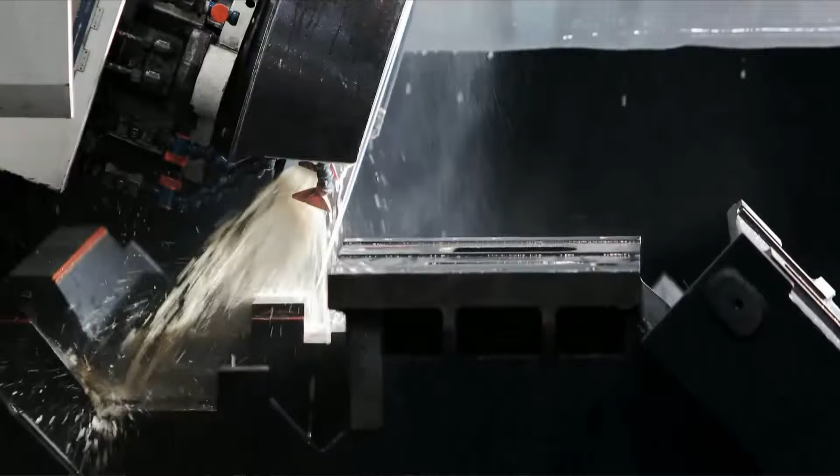Machine tools are the mother of all manufacturing, including the aerospace and high-tech industries, like a giant wheel turning the world. Taiwan's flexible production capability makes us a key partner of the world's industrial powers. We take pride in our sustainable industries.

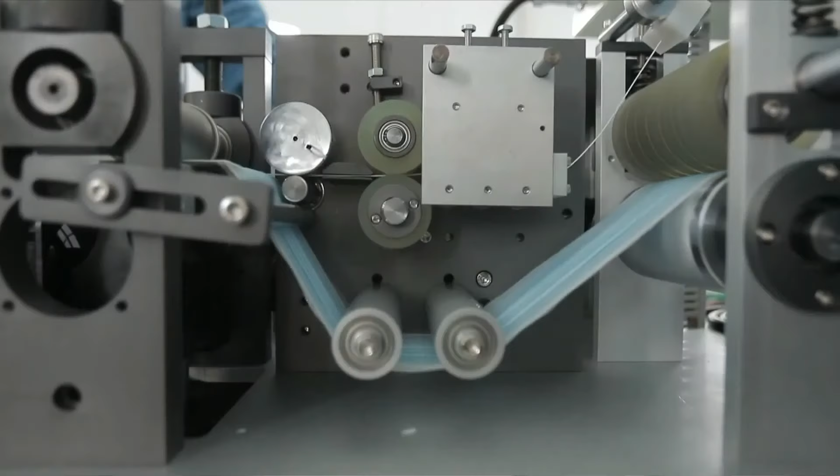The COVID-19 pandemic caused a global shortage of surgical masks. At this critical moment, machine tool manufacturers in Taiwan quickly took responsibility to set up production lines for surgical masks to alleviate the national crisis. Before the pandemic, Taiwan imported 80% of its face masks. Now producing up to 19 million pieces per day, Taiwan is the world's second largest producer of face masks, putting it under the global spotlight.

Over 2,500 people work the production lines. The national team demonstrates the unity, mobility, and efficiency of Taiwan's machine tool industry.

A manufacturing hub sits deep in the heart of Taichung. The 60 production lines were quickly set up in 25 days to assist the government. The national team assembles over 30 companies. We support the nation with honor and pride.

We take this opportunity to expand further into the markets of the US, EU, and ASEAN nations, and develop more talents, as well as our capacities in smart manufacturing.

Advanced technology with laser-focused dedication for perfection. Machine tools made in Taiwan, featuring Taiwan Excellence, moving towards smart manufacturing.

As an organizer of Taiwan Excellence, we are proud to promote the machine tool industry and Taiwan face mask team, and we are happy to share this Mission Impossible story with the world.

In normal times, we take care of the industries. When needs arise, the industries combine their forces to support the government. Let me extend my appreciation once again to the machine tool manufacturers for their great support.

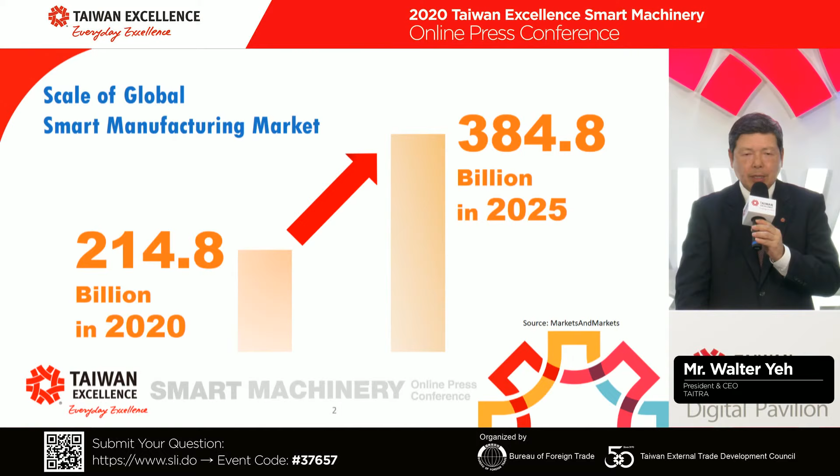Taiwan Excellence strives to continually showcase the best Taiwanese technologies in the world, even during this challenging time. We therefore launched the Taiwan Excellence Smart Machinery Virtual Pavilion to allow buyers around the world to access their products from anywhere at any time.

60 innovative products from 50 brands, including leading machine tools companies, can be found in the virtual pavilion. Products in the virtual pavilion will be kept updated to ensure buyers can always get the state-of-the-art technologies from Taiwan.

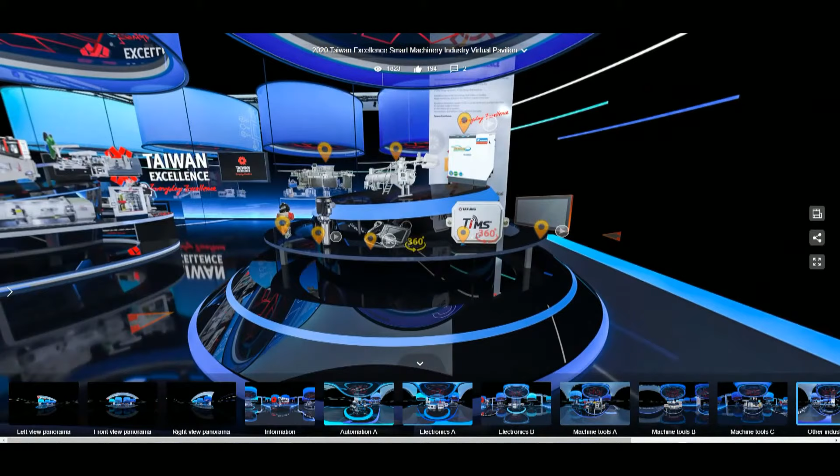Let's move on to the electronics manufacturing equipment area, the machine tools area, and the other industrial equipment area. And now we will focus on mechanical parts.

Here you can see HIWIN. You can click the icon to read the introduction, or click on 360 to view a picture of the product in 3D. Here you can rotate, zoom in, or zoom out for more details.

If you have any questions, you can move to our information counter in the pavilion. Click on the icon on the counter to leave your inquiry and contact us directly.

Next, we're moving on to the presentations. During this section, please feel free to submit your questions using the Q&A link on the screen. We will collect all the questions and invite the speakers to answer them during the Q&A session after all the presentations are completed.

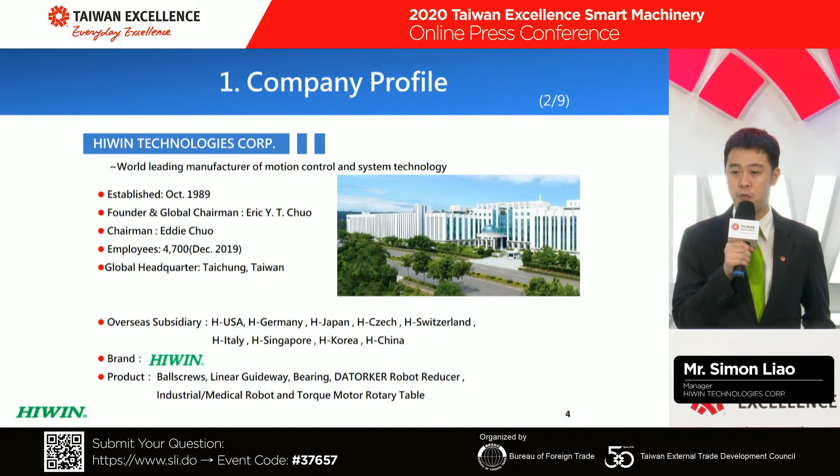Let's look at HIWIN Microsystem. It was established in 1997 to provide electronic component solutions for HIWIN Technologies products and offer a total solution to our customers. There are 600 employees with subsidiaries in Russia. The main products for HIWIN Microsystem consist of servo motors and drives, torque motors, and linear motors.

All of HIWIN's factories are located in Taiwan. We have a total of 7 factories in Taiwan, so all the key components for our products are made in Taiwan. HIWIN also has a global network, having 9 subsidiaries and distribution channels in more than 50 countries worldwide.

Here is the product map of HIWIN. We started off by manufacturing linear motion products and then gradually began to provide more complex solutions and subsystem products. Since HIWIN manufactures all our own key components for precision products and machinery, we have been able to incorporate these components to provide integrated module products for industries and machines, such as industrial and medical robots and rotary tables, among others.

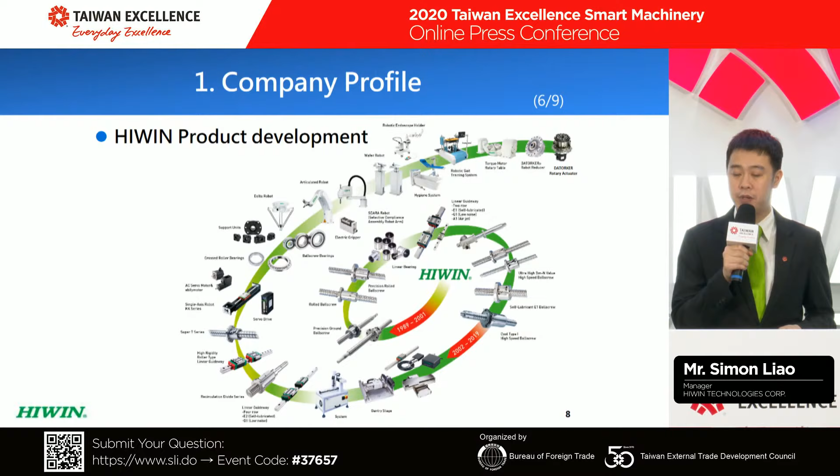Some of our best achievements include HIWIN currently being the global #2 in ball screws and linear guideway manufacture. We are also one of only 2 manufacturers in Asia for torque motors, and the only company that combines motion control components with electrical equipment to provide a complete solution to our customers. HIWIN is also the world's largest semiconductor coordinate robot supplier, and the 3 largest semiconductor equipment manufacturers in the world are key customers of HIWIN.

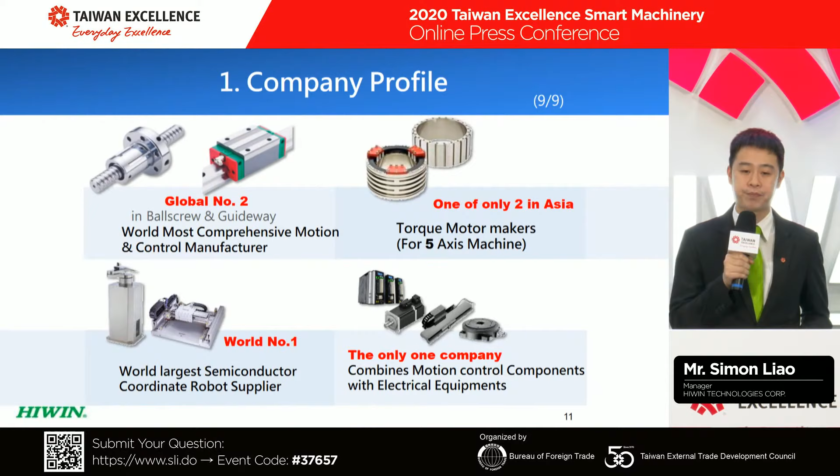Our outstanding performance has been recognized by the global media as well. We are ranked number 16 in the Nikkei Business Asia 300 Power Performers in July 2019. HIWIN was also ranked in Forbes Asia's 200 Best Under a Billion Company list in August 2019.

HIWIN has a constant focus on smart manufacturing, and we have collaborated with universities in Taiwan and abroad to develop the next generation Industry 4.0 ball screws. With a specially developed sensor and edge computing module, this Industry 4.0 ball screw is capable of pre-diagnosing the vibration, lubrication, temperature, and preload of a ball screw in precision machinery.

It is also capable of sending feedback to the operators via computers or smartphones to prevent an unexpected machine shutdown, thereby improving the productivity and reliability levels of the machines.

Next, we'll be introducing some of the total solution products of HIWIN, which are the core strength and value added to our customers. The KK Total Solution consists of the KK single-axis robot, couplings, servo motors, and drives. Customers receive this total solution for their automation. They just need to plug and play instead of looking for different suppliers for different parts and having the hassle of making and installing by themselves.

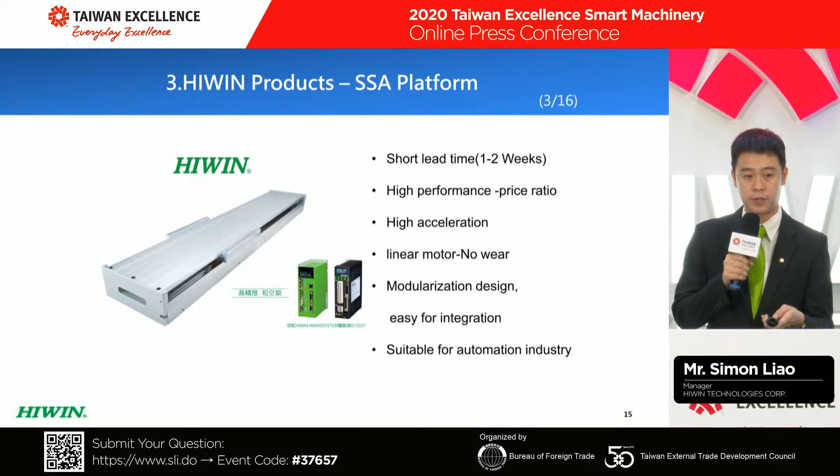As you can see here, some of the applications for this HIWIN KK Total Solution, including the application for LED inspection using HIWIN KK Total Solution.

Now this is a torque motor rotary table, which is one of HIWIN's main products. Being one of only 2 manufacturers of torque motors in Asia, we have the advantage of having in-house key components, technologies, and know-how. Therefore, we possess the competence to offer top quality, value-added products to high-end customers.

HIWIN designs and manufactures all the components such as torque motors, cross-roller bearings, rotary table bearings, and drives for our torque motor rotary tables. This is an example of the precision 5-axis machine using HIWIN torque motors to produce turbine blades for automotive parts.

The torque motor rotary table can also be used for this 5-axis machining to upgrade the machine and create a value-added function for customers. This enables the production of more complicated and precise components by a single machine. Here you can see the video of this 5-axis rotary table.

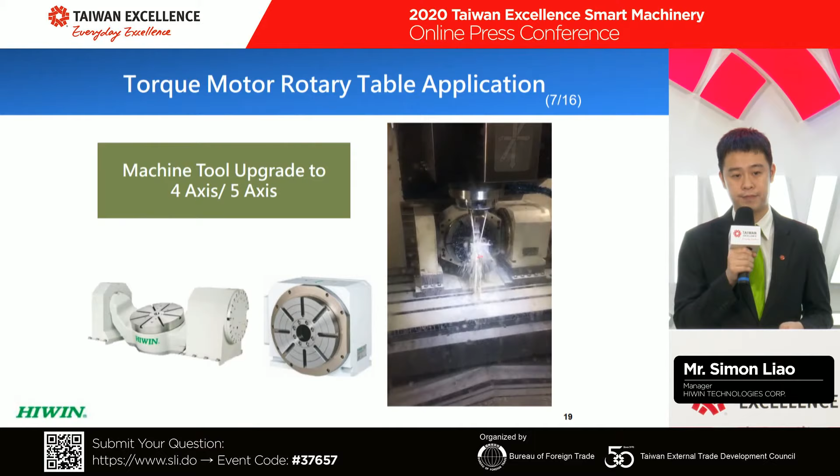Moving on to robots. HIWIN has a wide range of robots, ranging from articulated robots to SCARA robots for industrial applications, and Delta robots, mainly used in the food and pharma industries, to wafer robots, which are used in the semiconductor industries. Similar to the torque motor rotary table, all the major components of robots are manufactured solely by HIWIN.

This is an example of HIWIN's articulated robot for machining line pick and place. This is the Delta robot, installed for automatic labeling and pick and place in the food industries. Here is the SCARA robot for packaging and in-process inspection. And this shows the HIWIN wafer robots for wafer handling processes.

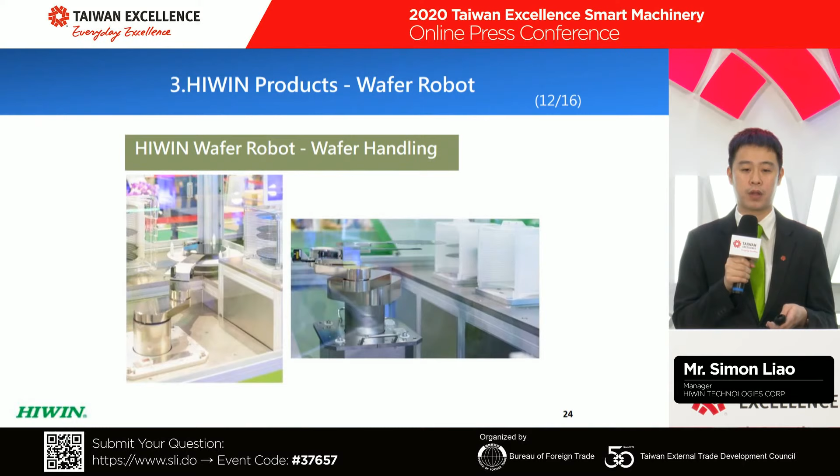This latest total solution product from HIWIN is the DRA, Datorker Rotary Actuator. This Datorker is a great precision and compact gear reducer with a high reduction ratio used in robots, high precision machinery, and indexing applications. Along with a servo motor and a D2D drive, we can offer customers an integrated product.

Again, the customers just need to plug and play. It offers an effective solution to our customers, performing precisely while ensuring the output of top quality products. Here you can see the applications of our DRA in process inspection platforms and automated equipment.

Displayed here is HIWIN's KK Total Solution with HIWIN Microsystems' linear motor installed in semiconductor process inspection equipment. The application of HIWIN's KK Total Solution with Microsystems' air bearing stage for semiconductor exposure machine. And here is a short video of this exposure machine.

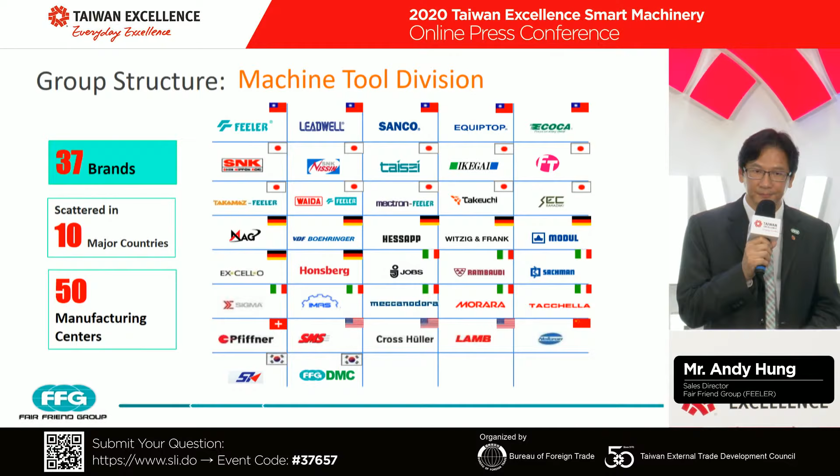With progressive growth, FFG is now a top 3 CNC machine tool manufacturer in the world. We provide all kinds of technology and solutions to drive human civilization forward. In terms of market share, FFG is number 1 in automotive, providing all kinds of turnkey solutions for our customers. We are number 2 in aerospace, number 3 in energy, and number 5 in the railway industry.

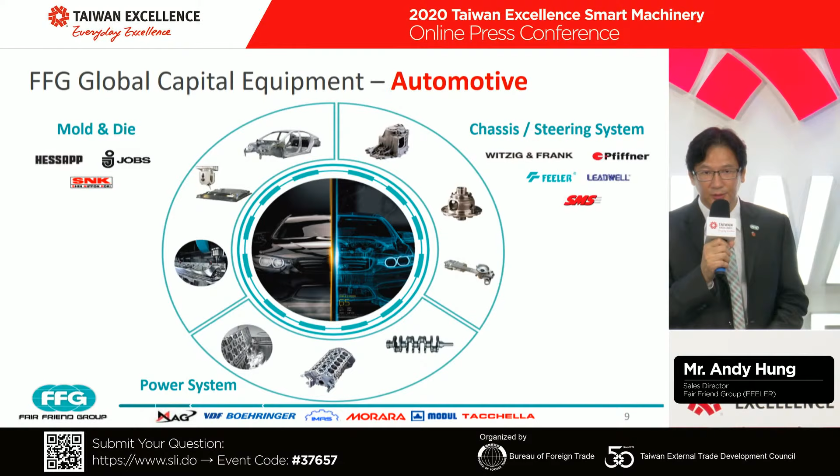Next is the railway industry, especially machines for train wheels and axles. For the energy industry, FFG covers a very wide range of power, turbines, and oil and gas applications. For the IT industry, we can very successfully offer tablet and cell phone machining. For the shipbuilding industry, components like crankshafts and diesel engines are also our field of expertise.

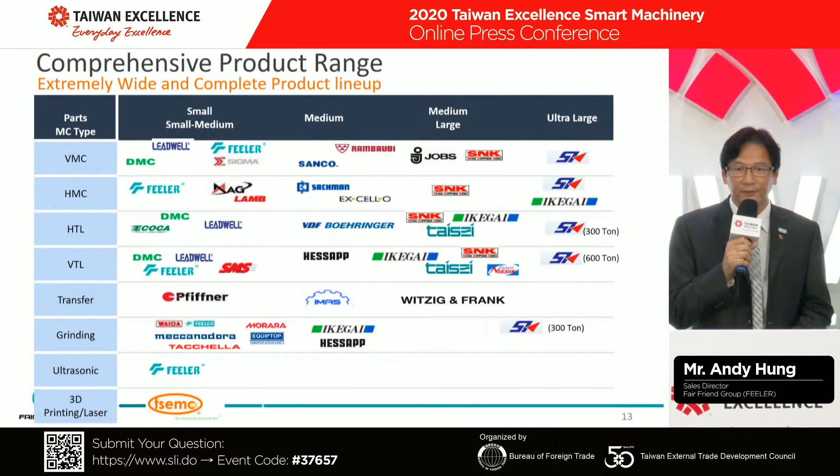With this comprehensive range, FFG can handle all pieces from small to big, such as something as small as a fingernail, and even larger ones up to 300 ton parts. Our machine types include vertical machining centers, horizontal machining centers, vertical lathes, transfer machines, and grinding technology to cover all the technology. We are also developing high-end 3D printing machines and ultrasonic technology, which helps us handle very tough materials with innovative technologies.

We are very proud to have received the Taiwan Excellence Gold Award in 2018, and this recognition has given us great help in promoting our products.

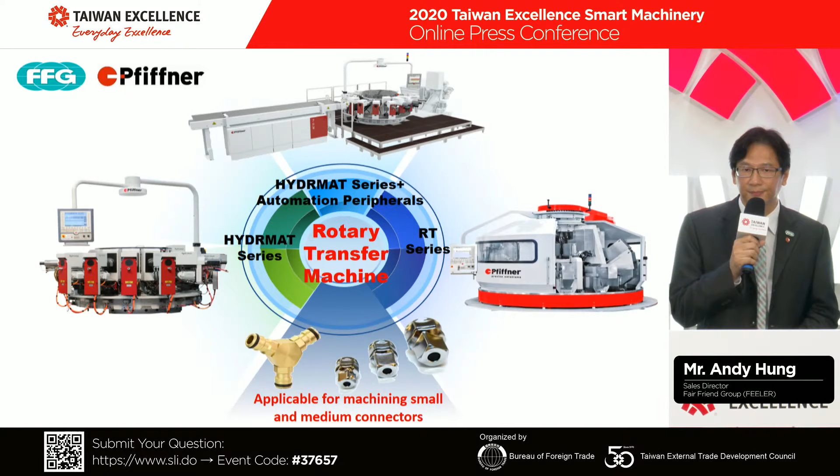On the next page, we would like to share with you that we focus on the future trend of smart manufacturing. We are also a leading company in Industry 4.0, and we provide a total solution of 5G smart manufacturing. We will go through this to strengthen our position.

This page shows that FFG is the founder of Industry 4.0, especially made in Germany, and specialized for automotive brands like Mercedes-Benz, BMW, and Volkswagen. This is our mission, to try to offer smart manufacturing to our customers.

FFG's core competence is that we have acquired so many machine tool brands, and the value of the acquisition is significant. In technology, we gain all the advanced technology and transfer it internally to our different divisions, to maximize our efficiency, reduce our cost, and make our lead time much shorter.

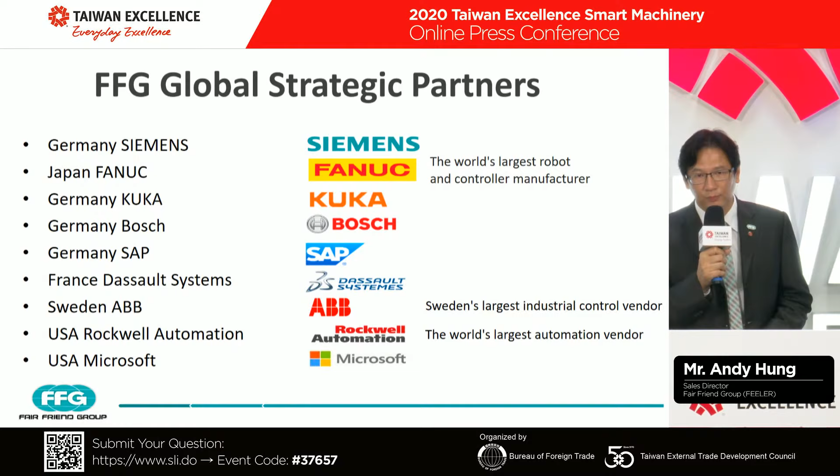To become successful in Industry 4.0, partners are very important for hardware, software, and control, for example Siemens, KUKA, Bosch, and SAP. These are all our strategic partners that help make our Industry 4.0 successful.

This shows the four levels of Industry 4.0. We go from small, single smart manufacturing units up to smart manufacturing lines, the third level is smart manufacturing management, and the top level is the data server and digital twins.

From our standalone machines, we can install sensors like cutting vibration technology, thermal compensation technology, and anti-collision systems, making the machine much smarter and even preventing bad parts from being produced.

The next one is line monitoring. We created parts like spindle and turret magazine monitoring, and also installed more systems to become a smart manufacturer, which collects all the data to show a dashboard displaying the status of the entire production line.

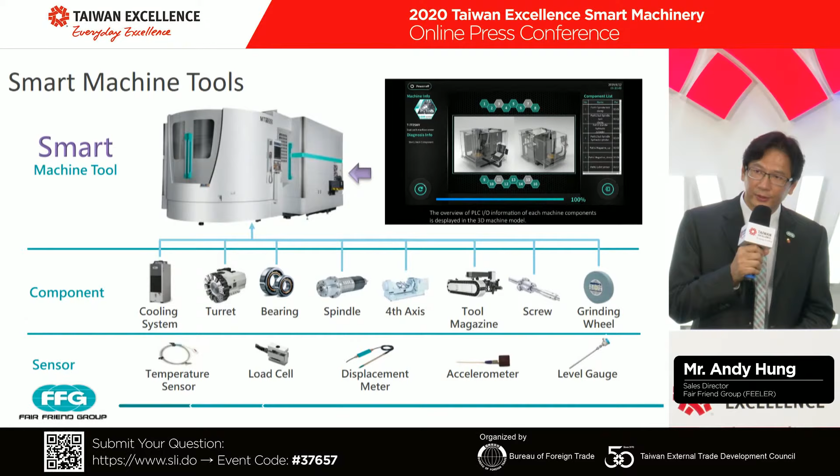In the upper right corner is FFG iFast, a more friendly interface that lets operators and management easily monitor the condition of production. It's built as a friendly framework to help managers and operators catch real-time information.

Even with different kinds of machines and controllers, we can catch all the data and transfer it into our dashboards, making it easy to understand the machine condition and total production instantly.

In this one, you can see the videos. In 2019, we showed our automated production line and main system, which can totally run 24 hours, 7 days a week, for engine block production, including horizontal machining centers, AGV, and robots.

We also made a 3D simulation, so customers can see exactly what the demo lines look like even before implementation.

So this is what we'd like to show you: Industry 4.0 is a big construction project. Especially, we need to integrate many additional accessories, and for transmitting without lag, 5G is also the key to a successful platform. No one can do that alone, and we need to integrate with our machines.

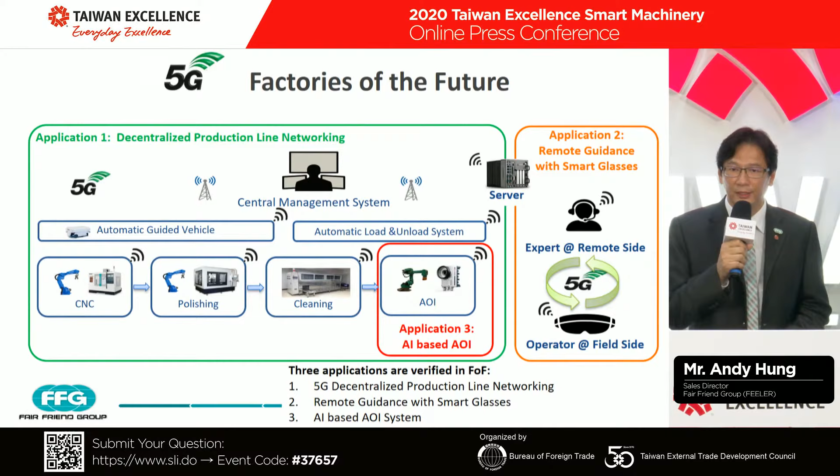We already have 5G factories in Taiwan, including for AGV, robots, cleaning, AOI, and online robots. So we sincerely invite you to go into Industry 4.0, the revolution is coming.

We are very glad to say FFG can offer customized solutions for different kinds of industries. Let us be your win for the future. Thank you very much.

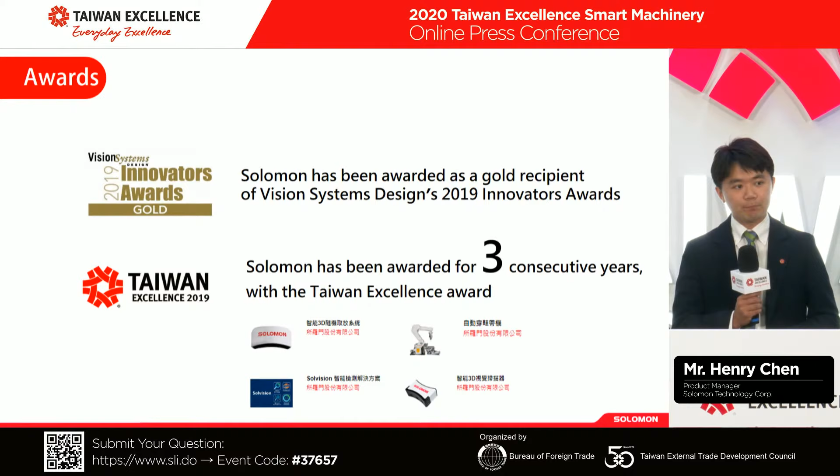We are a Vision Award winner, starting from 2019, which is the biggest Vision Award in the world. And of course, we are a continuous Taiwan Excellence winner. So on this page, I'm going to tell you what we can do for you.

AI software from Solomon is like a platform. We can communicate with different scanners, like structured light technology from the Solomon scanner or Intel RealSense. We are able to customize, depending on your budget and accuracy requirements, to give you professional consulting about which scanner you would like to use. We are also able to communicate with robots, including cobots or industrial grade. We can integrate more than 20 robot brands for now. And we not only send the coordinates, but also communicate with and control those robots in your factory.

A lot of people ask me what your AI can do for me. Actually, our AI is like the human brain, and we are able to learn the parts not only from the shape or the contour, but we can see the color and the pattern. Through our AI deep learning model, you can learn the parts you would like, like human eyes. We don't need a CAD file.

We offer our software interface without any programming. You don't have to do any coding. It's very easy to use. And we can read the parts combined with the 3D point cloud. We give you the accurate point cloud and coordinates.

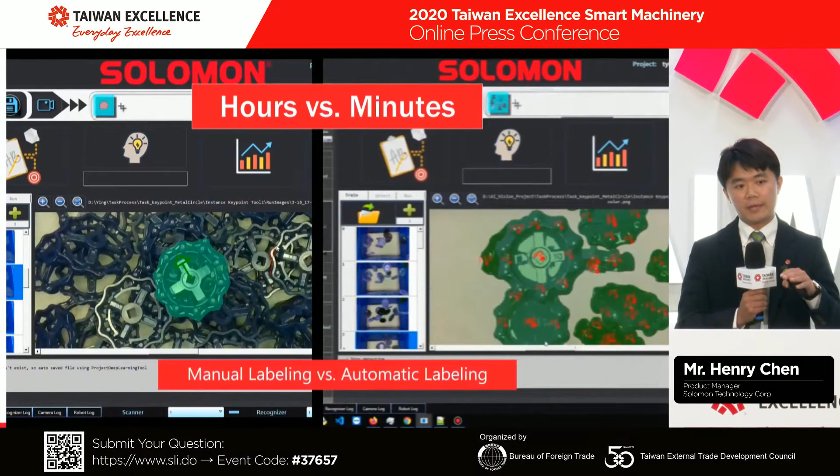For example, here in this video, you might have some parts like this in your factory. You want to do pick and place or robot guiding. With traditional technology, you have to do manual labeling by hand, right? But here, we offer you software to simulate all the possibilities in the process, and we can auto-label those parts and learn them in the 3D environment. So you can see, after a few minutes, the AI can learn those parts. We are able to see the top view or the bottom view and pick them in the 3D environment.

As I mentioned, we are able to control your robot. So not only sending the coordinates, but with our interface, we can control all the robots with one single control panel, which is the Solomon control panel. We call this service master control.

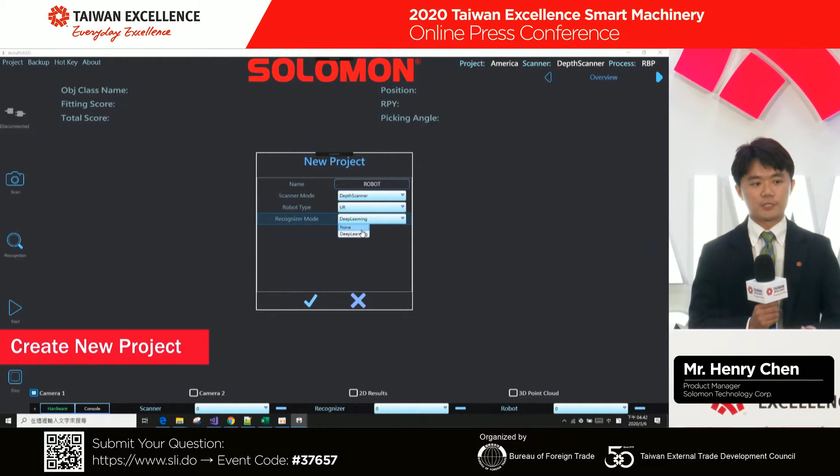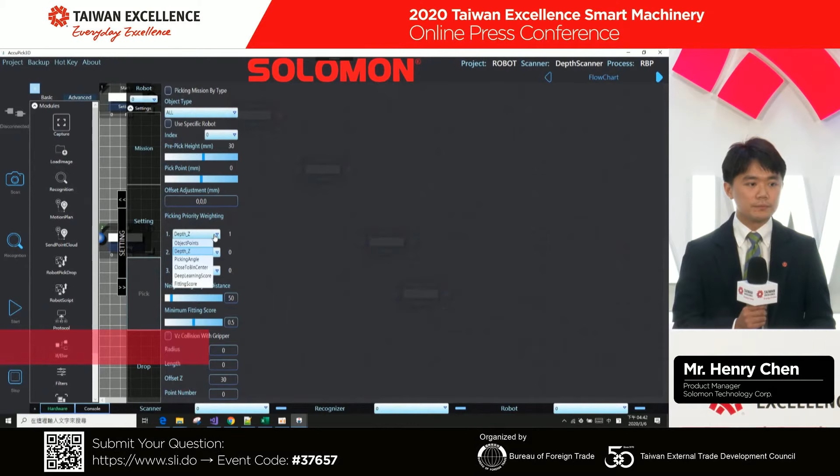So we got your values. We can use them to control your robot, as I show here. Not only that, we can also control I/O, grippers, sensors, or conveyors, all the surrounding equipment. So with one single interface, you are able to complete this robotic pick and place mission. This is our pick and place, pick and drop setting. After all the detailed settings, you connect the whole sequence, make it a loop, and it's finished.

Okay, so because of the time, here I want to show you some of the references we have. I start from AccuPick, which is the robotic pick and place. The first project I would like to share with you is the video filmed by National Geographic. We're doing this automation for one of our logistics partners, CTW Logistics.

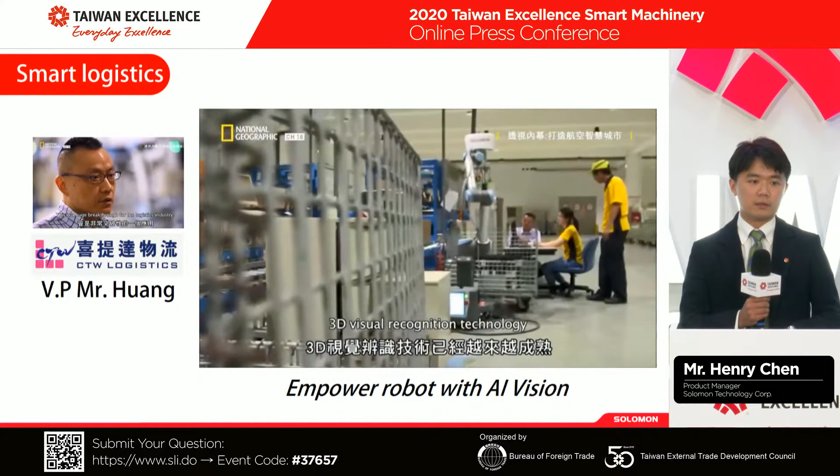So you can see if you don't have the vision, the robot can only do the repeated job, right? It's like blind, totally blind. So if the parts in your crate shift or change position, you are not able to pick them successfully. So here, Solomon provides the vision to be able to see the parts in the crate. And every time, depending on the situation in real time, we give you the coordinates of those containers. So this is one of our services to do the loading and unloading.

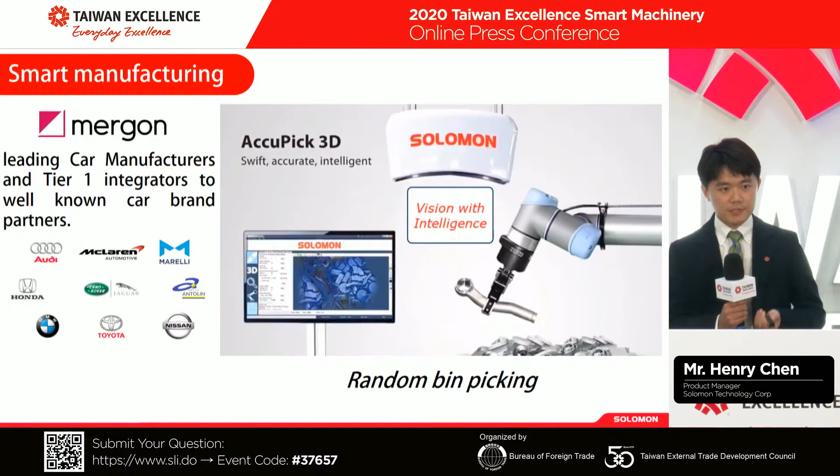And second, I take the Mergon example here. They are a leading car manufacturer in the US. Here, we challenged one of the bin picking solutions for them. We are able to pick something really tiny and shiny. For example, here, you can see the parts. All right. So you can see the parts. They are around 1 centimeter by 1 centimeter, and the surface is shining.

Sometimes they are overlapping. So with traditional 2D vision, it's almost impossible, and they almost failed in the project. That's why they came to us, and using our 3D technology, we are able to deep learn those parts in the top view or the bottom view. So the service is good, the production line is continuously running, and we got repeat orders from this project as well.

So after scanning, we are able to get the position and all the offset data, and after we analyze, we compensate those coordinates in 3D and send them back to the robot. So even if the customer has an offset of more than 5 centimeters, we are still able to provide them the compensation data and do the gluing or sealing they want. So in the future, you don't have to be troubled about which kind of customized fixture you have to use in manufacturing. We try to give you a generic, so-called universal solution. One single scanner, and you can do all the robot guiding without any problem.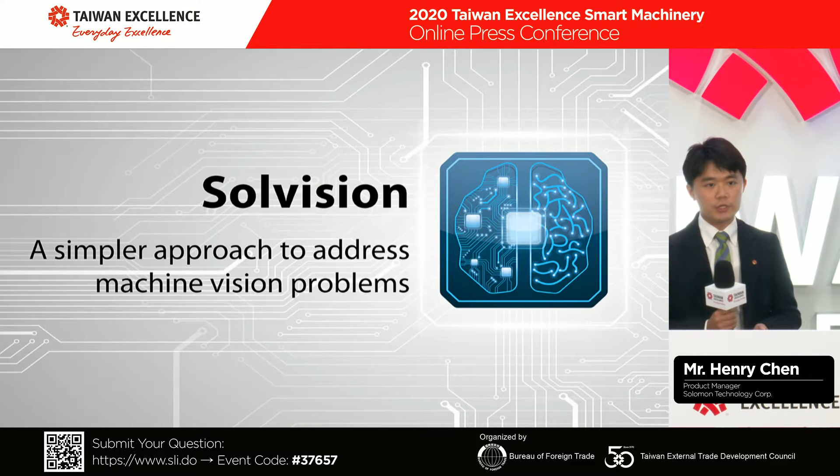The final product is Solvision, which uses our AI software to do the inspection job. What we focus on is usually defects that are difficult to define. For example, the color range or the size varies. Using the traditional way, it's almost impossible to give you the golden sample. So in this situation, you use our AI to deep learn those different kinds of defects, and we create the model for you. So with this AI model, you can run it on your production line, and it can see like human eyes which defects you want to pick away.

Okay, so together we have robotic solutions, including 3D pick and place, robot guiding, and finally Solvision to do the AI inspection.

After more than 3 decades in the machining industry, people have got used to us. Through periods of high growth and development, we were right there at the front. And through times of uncertainty and doubt, we stared adversity in the face, unshakable. We have developed a thick skin, an amazing ability to move forward with determination. Every step in our journey has left a mark, on us and in the market.

Over many years, we have developed great partnerships, invested in development, reinvented ourselves a few times, all in the interest of being here for the next generation of machine users, all in the interest of being here for you. Nowhere in the world will you find a team more determined to be around for 100 years. And we know we will, through the quality of our products, through the strength of our partners, through the unbeatable value that we offer. Manford. Power and determination.

Okay, after this short video, I'm proud to tell you about the founder of Manford Machinery, Mr. James Shade. His goal is to provide a one-stop service for his customers. So since the company started in 1987, the Manford Group has expanded the scope of its business by building up 5 individual brands: Manford, Winford, Avemax, Automax Smart Auto, and Manford Garden, with each one focusing on different products designed for use in specific fields.

So for the purpose of one-stop service, Manford Group has more than 33,000 square meters of production space and around 200 employees to ensure the consistent supply of products with very competitive lead times. Let me introduce more about our brands.

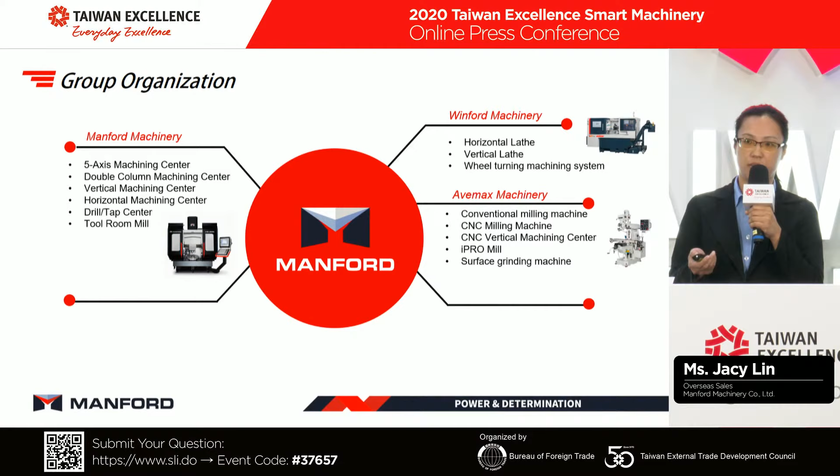Our high-end CNC machining centers, like 5-axis machines or double-column machines, are manufactured by Manford, and Winford focuses on CNC lathes. And Avemax takes charge of conventional milling machines. And Automax mainly integrates the systems to make automation planning for the whole production line. And thanks to Manford Garden, our machines come with leading edge outfit. Now I will give you a brief overview of our products.

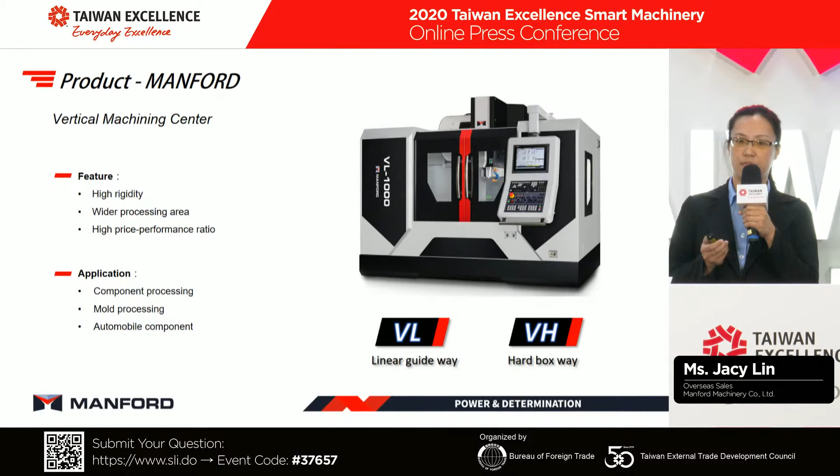This is a conventional milling machine produced by Avemax, applied for automobile components or molds. While this is its surface grinding machine. And this is Winford's CNC lathe. Please note that we provide both vertical and horizontal CNC lathes. And Manford's vertical machining center, which has the VL and the VH series, is displayed here. X-axis travel from 510 to 2,200 millimeters.

And for the growing market of 5-axis machines, Manford has launched VU, VG, and VX series of 5-axis machines to respond to the increasing demand. Here, I would like to take a little bit more time to introduce the VU620 for you. The VU620 was designed and developed by Manford for the growing market of 5-axis machines. What makes it special? Well, for a start, it uses 90% less oil and 80% less electricity than the normal lubrication system and pump motor.

In addition, it is capable of 5-face machining that can be completed in one clamping with high precision and short process time. Second, it reduces special fixture dependency and realizes automation. And third, 5-axis machining extends tool life and improves service quality. And fourth, it reduces equipment investment costs, workshop footprint, and even the number of workshops necessary to produce your products. So based on all of the above characteristics, the Manford VU620 won the 2020 Taiwan Excellence Award as an honor.

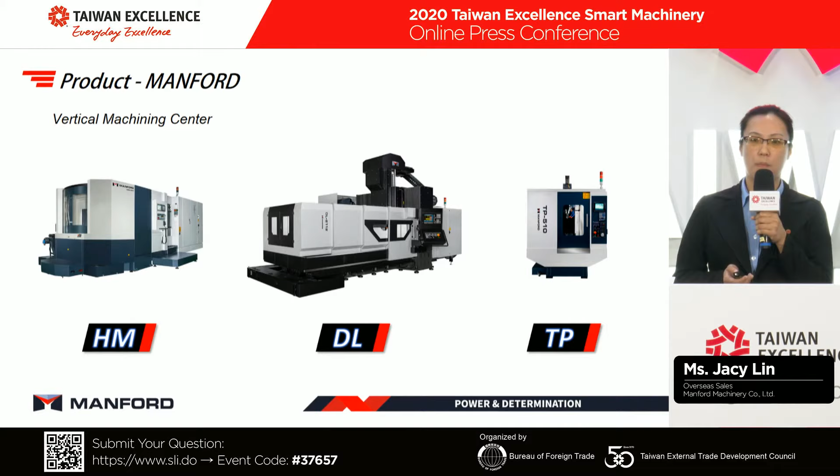Other machine types like the horizontal machining center, the double column machining center and the tapping center are all part of Manford's product range. And thanks to the complete product line, our machines can be used in a variety of industries, such as aerospace, automotive, 5-axis application, and high-tech electronics, among others. It is feasible for us to customize the machines based on specific requirements.

And we can do this because we have built our expertise in the machine tool field over time and will keep moving forward based on our core technologies. There is strong mechatronic engineering support, a professional R&D team, application research, and professional manufacturing and inspection equipment. So innovation in Manford never stops.

For the coming Industry 4.0, providing only various high-quality machinery cannot satisfy our customers anymore. So we started offering valuable services, such as turnkey solutions, customized automation, and so on. Now we are also developing intelligent systems to realize smart manufacturing. I would like to show you another video of our automation system.

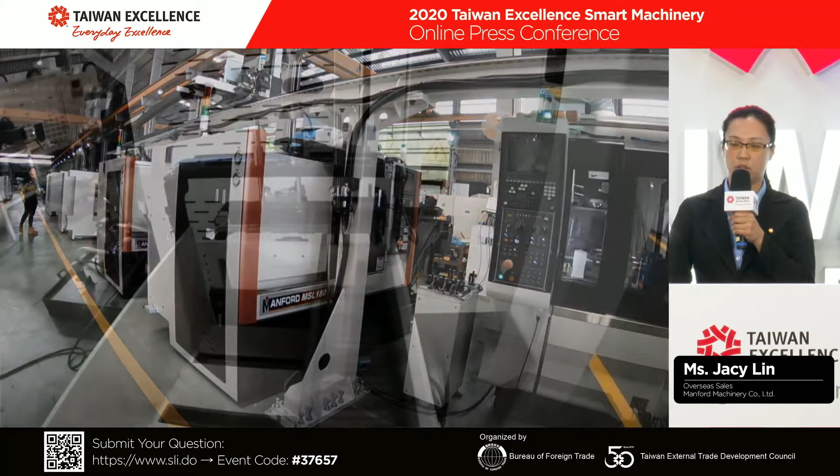This is the material loading place. And then this is the switching place.

And this is our FMV 400 machining center. And this is a high frequency induction hot plate.

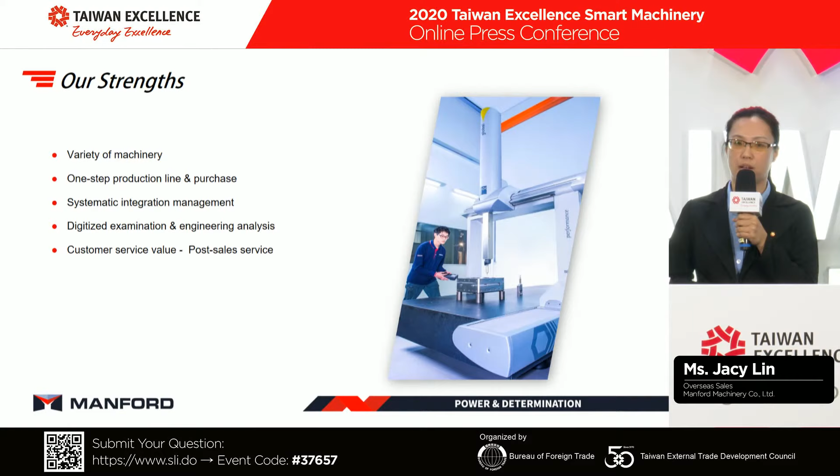So with the confidence and mutual cooperation, we sell our products worldwide, and customers are mainly located in Europe and North America. But we have a growing base in Russia and in India. Moreover, we are very open to opportunities of cooperation in other global markets.

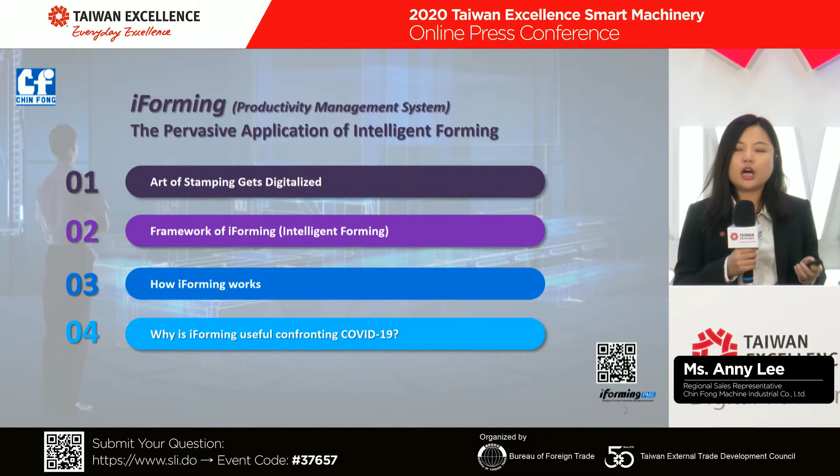So this is my outline for today. I will start with sharing why we started to get digitalized, and then I will introduce a framework of the iForming system, how it works, and why it is useful confronting COVID-19.

So this is a story from one of our customers. They are an international company with 122,000 employees. Before COVID-19, they had great demand in cross-plant communication and travels. But after COVID-19, they were asked to strictly adhere to the policy of remote management.

But how to achieve remote management? First, you need to have the connection to your equipment, and then you need to be capable of automating your production, your efficiency management, and your supervision over manpower. So here we see the need for smart manufacturing.

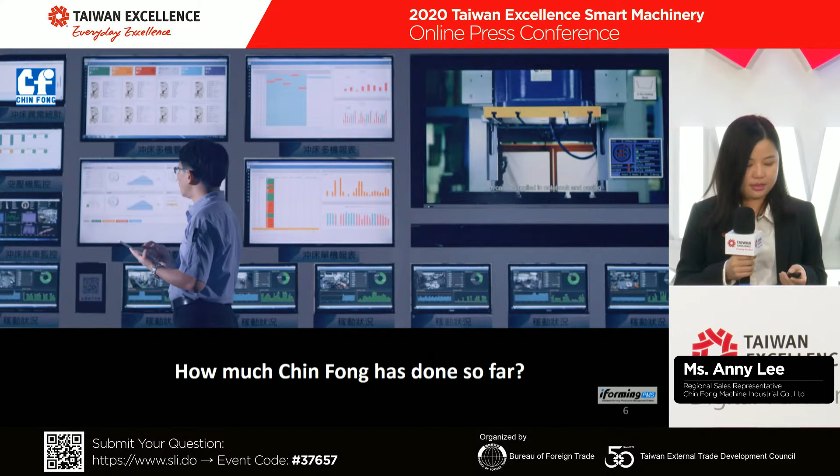So now, how much has Chin Fong done so far for smart manufacturing? The idea of eye-forming could be easy to understand, but how do we make it happen?

But this system is not just about data. Decision makers need to learn the information from within, and they also need to improve their production schedule. And now this is made even easier, as all the information collected from the iForming system is now dedicated directly to statistical analysis.

So here we can see that everybody has their own ERP system, but it's just about flow control. How do we know the work has been completed? No one knows. So here we can see that the iForming system, the smart system provided by Chin Fong, actually creates a platform where you get to find the mutual feedback from the on-site workers and the managers. So you get to find the work process and the work progress all together on a board system.

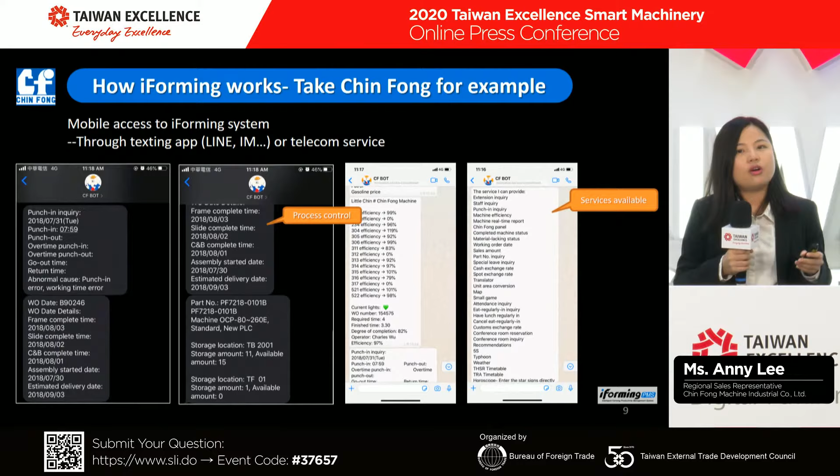So now the platform is all set for you, but what if you're not in your office? Just take out your smartphone. LINE will answer all of your questions about your factories.

So now, how could iForming be applied in the stamping field? This is one of our sales examples with the iForming system. Aurora has been manufacturing office furniture for more than 50 years, and they also possess several sets of our mechanical presses, which were operated under automated mode.

But to stay competitive, they still need to optimize their system. So here we can see that the idea of adopting the iForming system basically combines the conventional automation with the edge computing system, and together we display all the information collected onto a board system. This actually facilitates the review of resource allocation for our customers. So the rest for them is all about making their own decision.

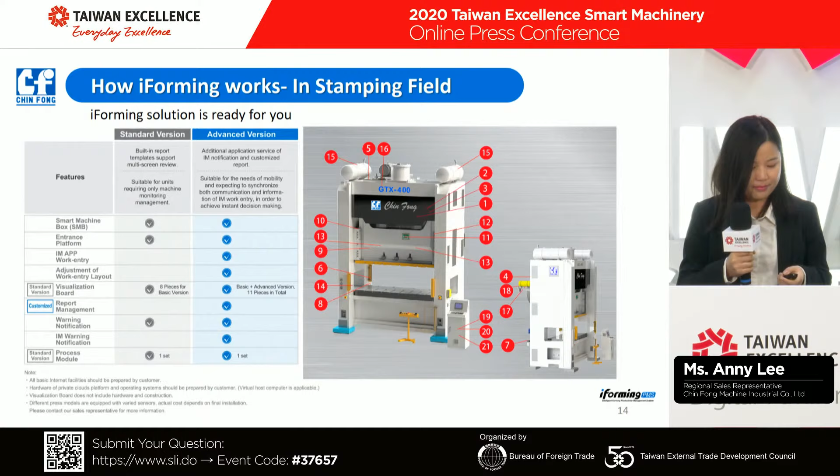So now, why is iForming useful in confronting COVID-19? Because this system is intelligent enough to bring your production management online, and that enables you to have remote control with smart manufacturing.

And this is the prototype of the intelligent plant of the future. As we can see, this is not only useful in front of COVID-19, but it's also useful for future needs of smart manufacturing. And we believe that with the iForming system, production management should be less trivial and more meaningful.

So this is the iForming system I've been introducing to everybody today. This is actually our showroom, and we've been developing this system for several years. We believe that it can create additional value for our customers, and we can do this for our customers.

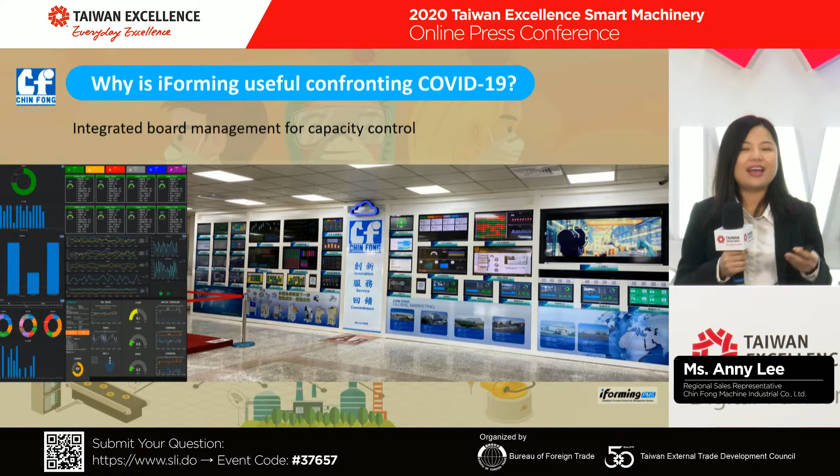So how about we just start with this solution provided by Chin Fong. We've been providing stamping solutions for the past 72 years, and we've sold our presses to more than 50 countries worldwide. We will continue to grow to answer the needs of the present and the future for the benefit of all of our customers. Thank you for your attention.

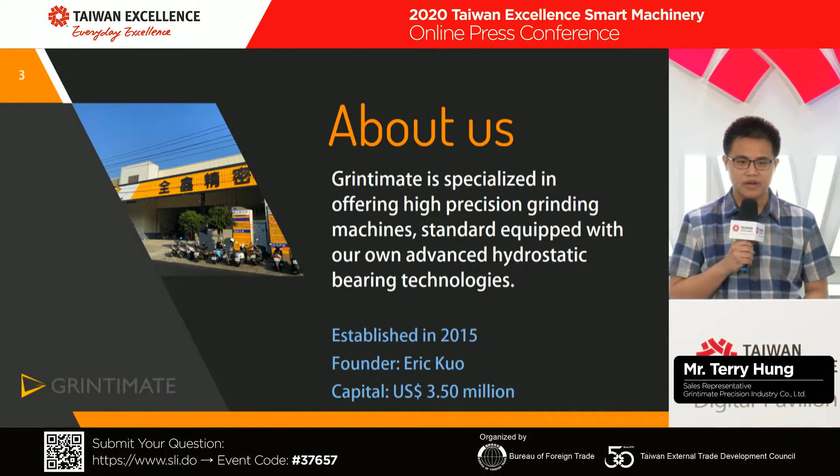Grintimate was established in 2015, and we are basically located in Taichung City. We specialize in offering high-precision hydrostatic grinding machines. Our core technology is hydrostatic components, and all of our products are equipped with a hydrostatic spindle system.

We have three main products: our hydrostatic cylindrical grinding machine, plunge type, which means our CTC series, and the CTS100. We also have hydrostatic cylindrical grinding machine, angular type, which belongs to our CIC series. Finally, the hydrostatic rotary surface grinding machine, which belongs to the GIC series.

Today, we'll concentrate on introducing our 2020 Taiwan Excellence award-winning product, the CTS100. As you can see the processing scope on the slide, the wheel width can be widened to 300 millimeters. We are the only company in Asia that can provide these specs. We'll talk about more detail in the coming page.

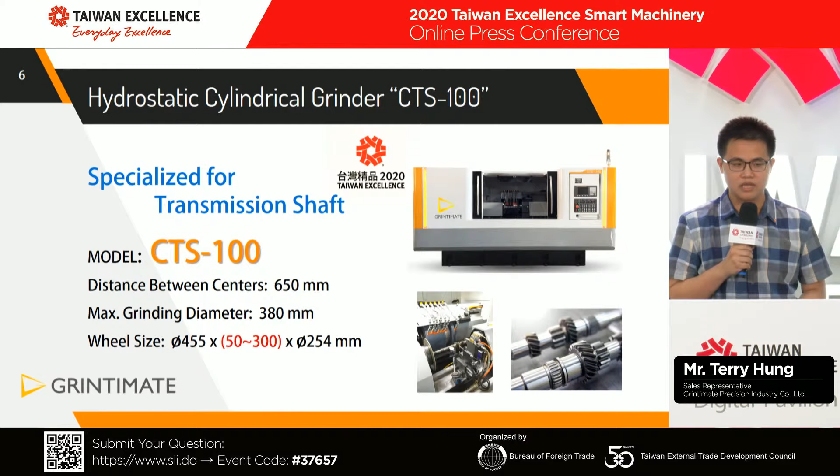The CTS100 is equipped with a hydrostatic spindle and hydrostatic guideway, and we use double-sided synchronous servo motors designed on the headstock and the tailstock. Because of the hydrostatic spindle system and the hydrostatic guideway, the machine features frictionless operation, no stick slip, low friction, high damping, high loading, and more. This serves to enhance the durability and service life of the machine. All in all, combining this hydrostatic spindle and hydrostatic guideway means high levels of accuracy and efficiency.

Next, I will show you more features of our machine. The X and Z axis are standard with THK high precision ball screw to ensure zero backlash. It's also standard with Heidenhain linear scale to ensure high processing accuracy and stability. On our controllers, we use Fanuc or Mitsubishi controller with an HMI system, which features fast communication and convenient control for user-friendly operation.

The CTS100 is perfectly suited to mass production. The grinding wheel can be widened to 300 millimeters, so it's capable of one feeding grinding and one-time processing to achieve the required dimension. Time and cost will be saved, and the CTS100 will definitely enhance the value of your products.

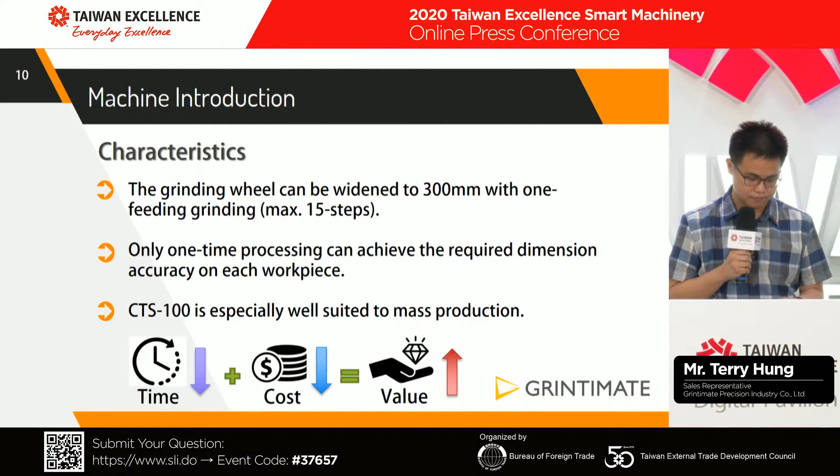As we mentioned before, we use a double-sided synchronous servo motor design on our tailstock and headstock. It helps you to do one-time processing. You don't have to take out or change the part and reverse it and put that in the machine again. This makes for a huge saving in processing time.

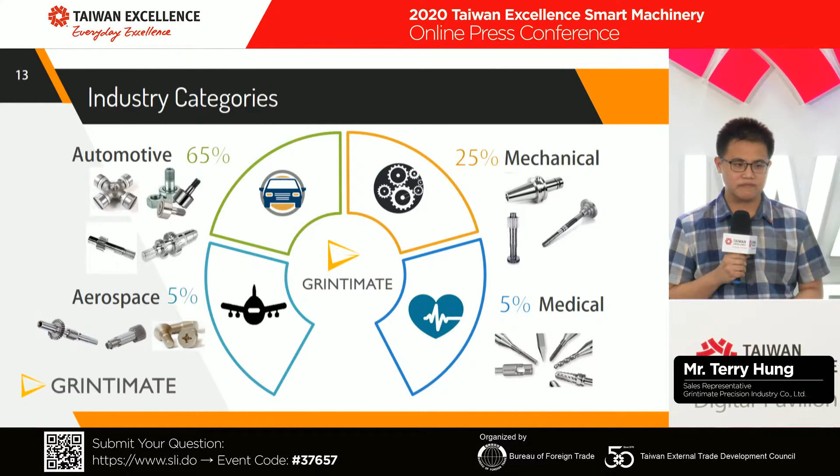Our valued customers come from a variety of industries, such as automotive, mechanical, aerospace, medical, and many more. This proves the effectiveness and the versatility of the CTS100. So therefore, if you are looking for a big breakthrough and transformation of your manufacturing processes, and you're looking for a high precision grinding machine at a reasonable price, please contact us and follow us.

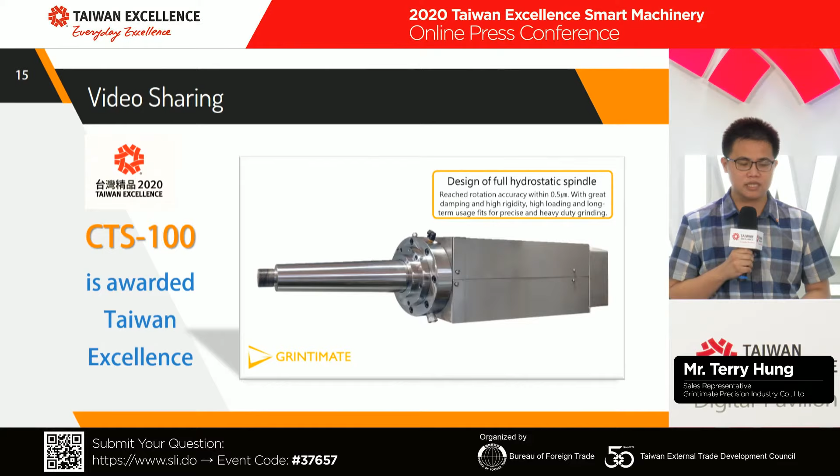It is equipped with an LED strip to clearly reveal the condition of the machine. Our spindle is capable of 0.5 micron rotation accuracy, also with high damping and high rigidity. Our wheel can be 300 millimeters, capable of one-time feeding. On the loading pad of our guideway, the deformation of the guideway is within 1 micron. You can push the guideway with one finger very easily without any stick-slip phenomenon.

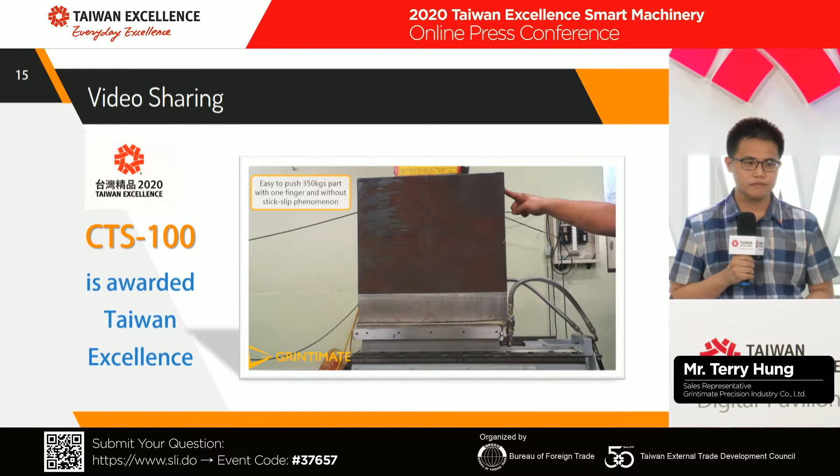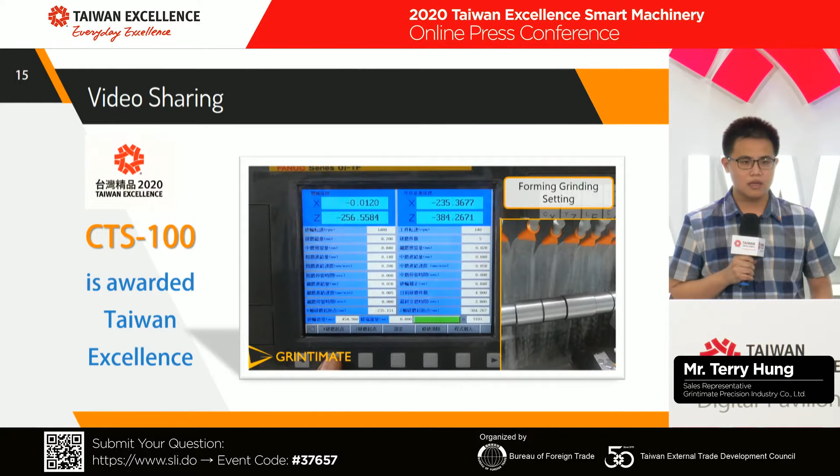With a 15-step dressing program, you can set your part diameter or depth on the program. Here is our dressing program attached. In our forming grinding setting, you can set your parameters.

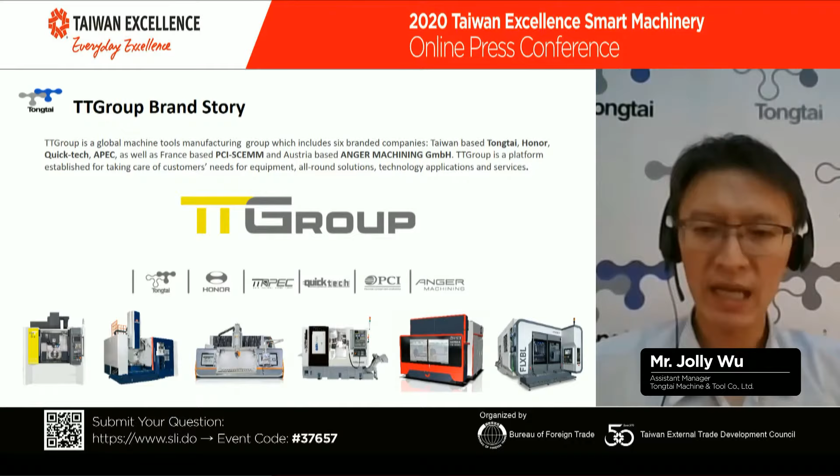To serve our customers, Tongtai commits ourselves to be the total solution provider. For years, we have been developing new technology for metal and laser cutting, ultrasonic and 3D printing, applied to our machine products, and bringing it to our customers, making sure they are happy with our solution so we can work together with customers.

Tongtai has over 50 years of experience, starting from special purpose machines to now a complete machining line, including different machining centers and CNC lathes. Our main products cover a wide range of machine tools to PCB laser drilling machines. All machines are designed and well made in Tongtai.

To serve our customers worldwide, Tongtai has 3 factories and more than 20 overseas branches, including technology centers, and more than 60 overseas agents working with our customers around the clock.

So what is intelligent manufacturing and what can Tongtai do for it? Intelligent manufacturing is an important element for Industry 4.0, and Tongtai applies cyber physical systems, or CPS, to help factories transfer into intelligent manufacturing.

Here are the 4 solutions Tongtai presents for intelligent manufacturing. First is the base of CNC machines. Tongtai has more than 100 different machines available for intelligent manufacturing, from CNC lathes to machining centers and multitasking, from metal cutting to ultrasonic for hard and brittle materials and 3D printing. So customers can always find good machines from Tongtai to serve their production easily.

Second is Tongtai automation. Tongtai has many successful experiences with automation, including integrations such as washing, QC station, and even QR code marking, all depending on the individual needs of customers.

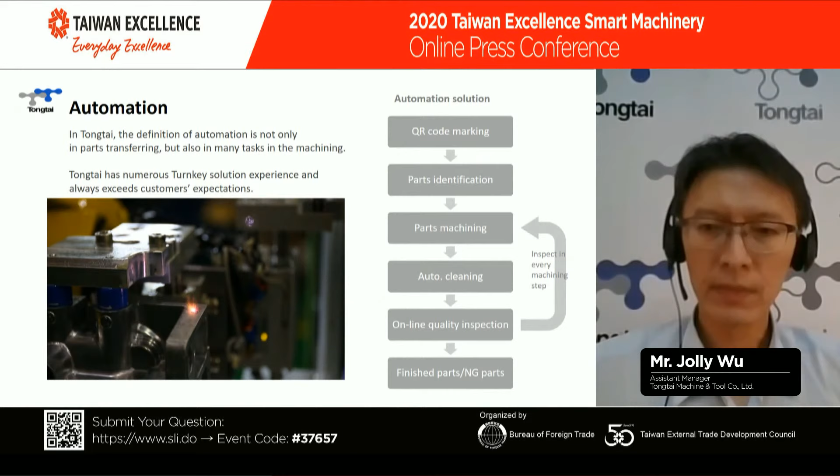Tongtai applies cyber physical systems, or CPS, to help factories transfer into intelligent manufacturing. First, we create a simulation program from a single machine, including machining time like rapid travel for each axis, ATC tool change time, APC pallet change time, etc. Based on the single machine simulation, we can build up a bigger simulation for both production line and production schedule, and we can focus on the production time to see where the bottleneck process is and try to optimize from the beginning.

After production, we can still monitor the production line from CPS on a daily basis and try to optimize to perfection. So with CPS, we can easily minimize the production risk and maximize the production output for customers. This is why CPS is the key technology for intelligent manufacturing.

Third is Tongtai machine tool intelligence. Tongtai has developed our own operation system called Tongtai Intelligent Management System, short for TIMS, to receive and coordinate all the data from machines and display all data on TIMS for production management. Also, Tongtai has been creating many software functions for machine monitoring, such as temperature control and cutting vibration control, so we can have better machine accuracy.

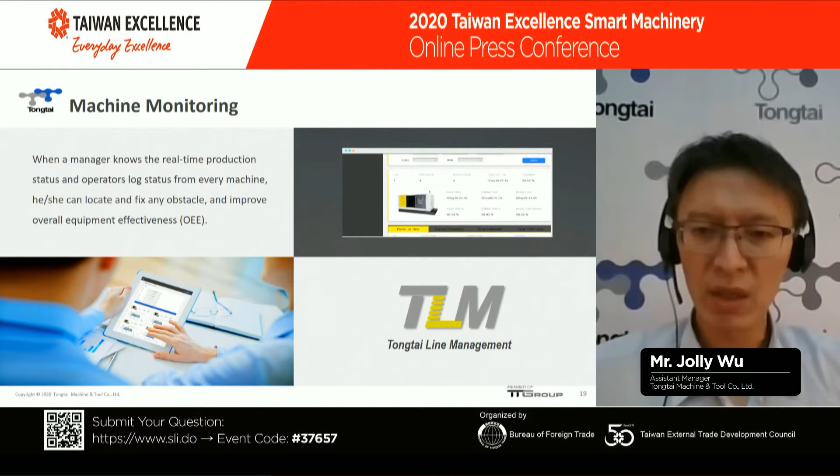Here we are going to share with you one of our successful stories for intelligent manufacturing with our customers in Taiwan. We have developed and implemented a production line with a flexible manufacturing system for our customers in Taiwan. This line has been designed for 6 parts in mass production, so customers can have more flexibility and efficiency from this new line.

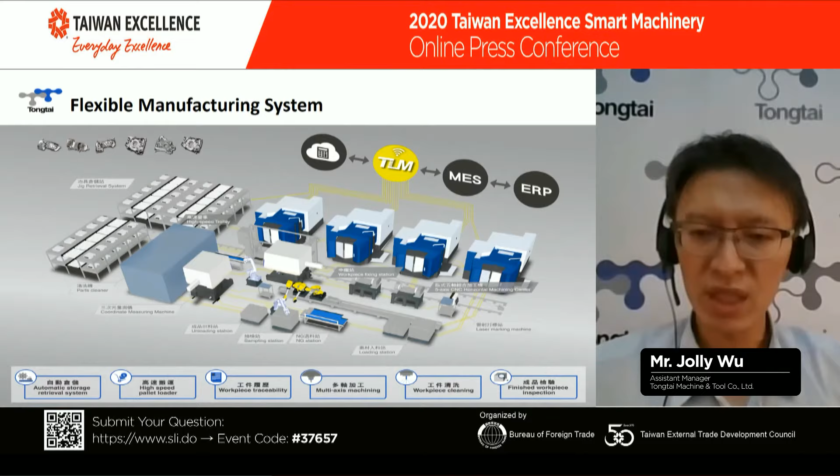This video shows Tongtai has been working together with our customers to develop the first flexible manufacturing system in Taiwan for their key component. In this line, it integrates 4 intelligent manufacturing solutions from Tongtai, as we just mentioned, including multi-axis machine, automation, and software for our teams and TLM system.

There are 4 great benefits for our customers. First, OEE improved by 20%. Second, manpower reduced by 70%. Third, shorter lead time from 3 days to 8 hours. Fourth, the availability for small and flexible production. Our customers are very happy with this new line.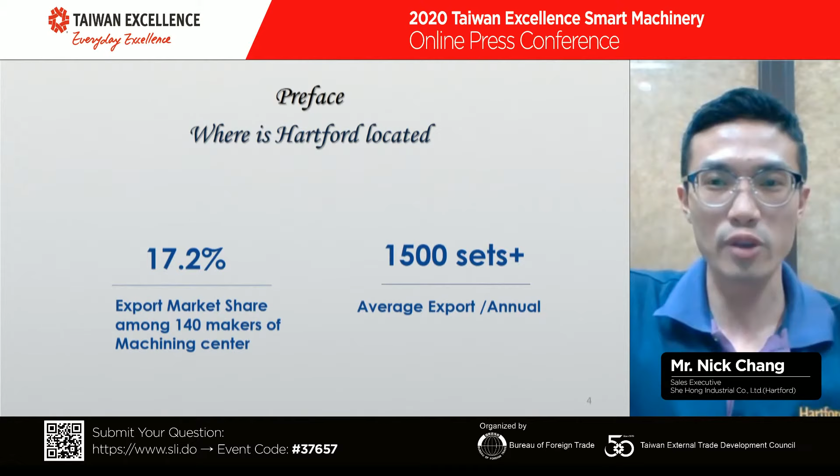What makes Hartford unique? Our principle: we produce machining centers only, 100% made in Taiwan. Even if it is just a small piece of screw, we still insist it is made in Taiwan. 100% professional managers — we hire professional and experienced managers to lead our company. 100% marketing by Hartford brand, which means we do not accept any OEMs. We only manufacture high-level and intelligent machines.

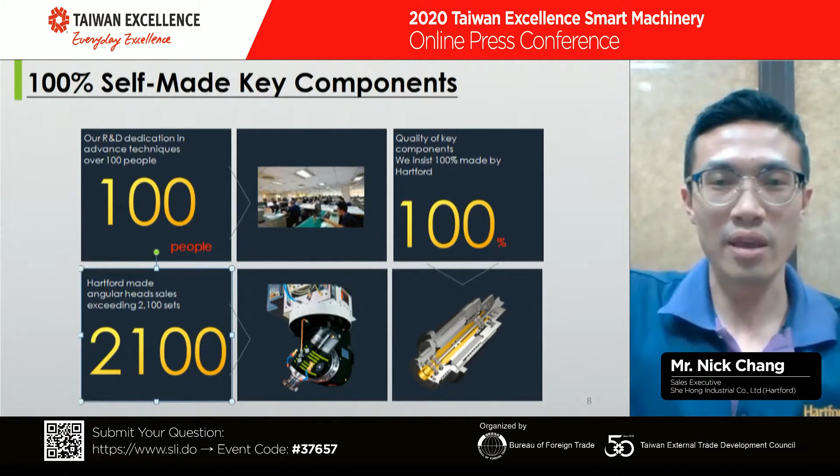And this is our 95% in-house production. We cast our own machine parts, using heat treatment to increase the rigidity, grinding, boring, and all features, all the way through the final shipment. 100% self-made key components, where Hartford makes our own angular heads, and also 24,000 RPM built-in spindles.

Market-leading machines. We have vertical machining centers in both box and linear guideways. The high-accuracy A-series premium, whose machining accuracy is equally as good as Japanese brands. A 5-axis vertical machining center, and those are the countries we have sold to.

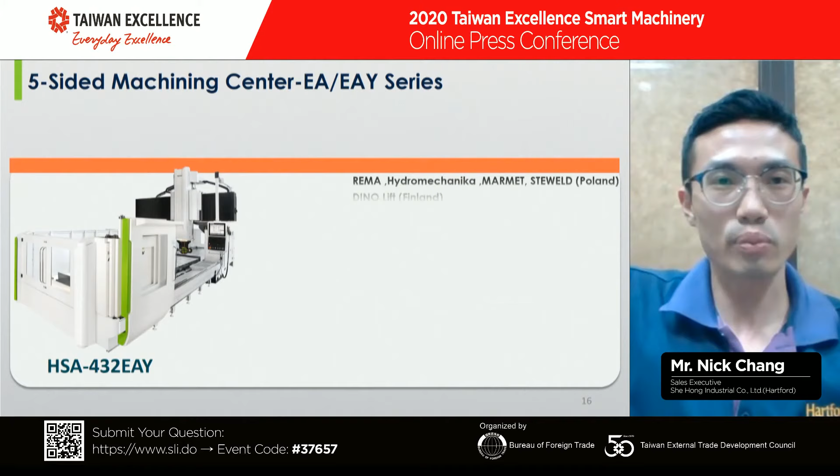5-axis double column machining center. The gantry type machining center. High-speed, high-accuracy machining center. 5-sided machining center with multi-head selection. Horizontal machining center. And precision boring machining center.

Hartford has over 100 R&D staff working on developing and improving our machines. And some of our R&D staff are now dedicated to our software, with a focus on integrating the next generation software for use in our future range of machines. And this is the solution, the Hartford Premium, which is our self-developed controller with our own interface. And we are the first company in Taiwan to have delivered a self-developed controller, and just the 6th in the world.

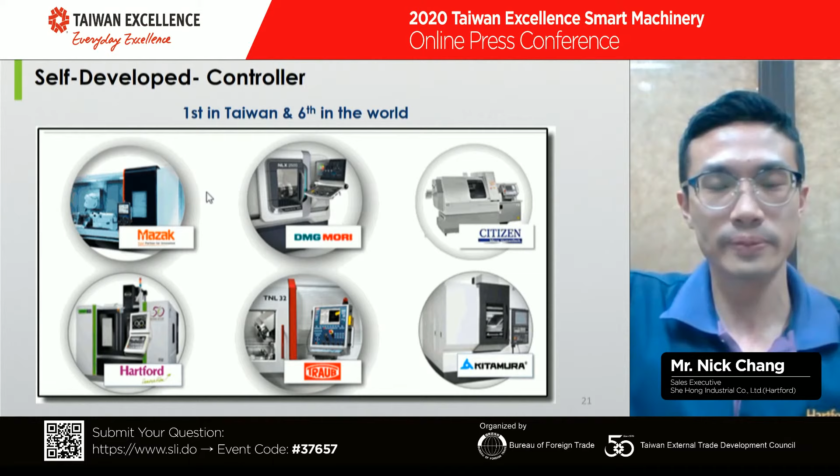Why should you have the Hartford Premium controller? It is because it's a machine with IoT, a machine with AI functions, a machine whose machining will not be influenced by temperature change, a machine with 0 downtime. Market-leading features. We have around 60 apps that can be downloaded to enhance your machining performance, and our R&D are still creating innovative apps that can reach the next level of intelligent generation. And the apps can be used before machining, during machining, and after machining.

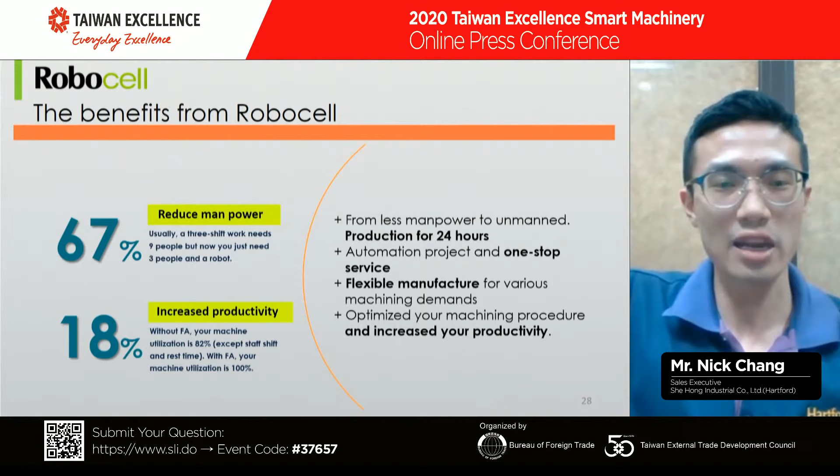Here is an example of an app you can use after machining, the 0 downtime. This app can check the spare part status and let you know which spare parts need to be substituted to minimize the machine downtime during machining. RoboCell. The benefit is to reduce manpower by 67% and increase productivity by 18%. And those numbers come from our customers in different industries.

iFactory means our machines can be connected together using the managed service called Superbox. It will allow us to do vital real-time management like monitoring, planning, analysis, and making predictions. Reaching Industry 4.0. Combining all technologies and intelligent generations means we are moving forward to reach Industry 4.0. That's why so many well-known clients have decided to choose Hartford.

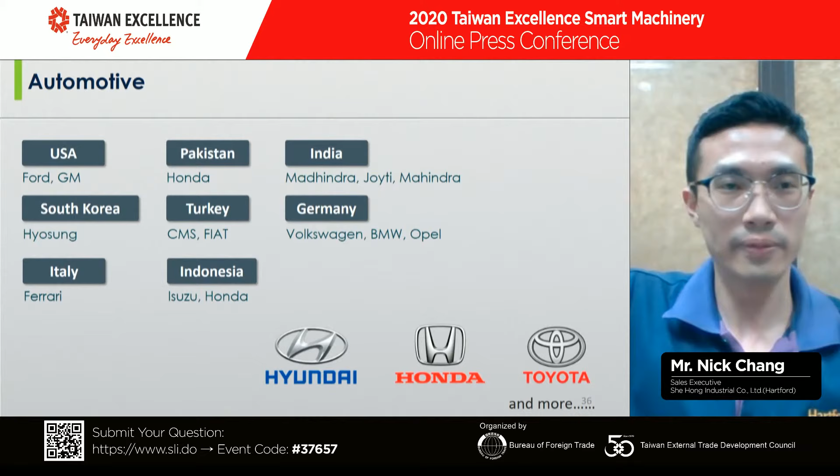Our world-class products lead to world-class clients in different industries like aerospace, automotive, railway, semiconductor and general electric and equipment, engineering, mechanical, and energy. Please take a look at our company video to know more about Hartford.

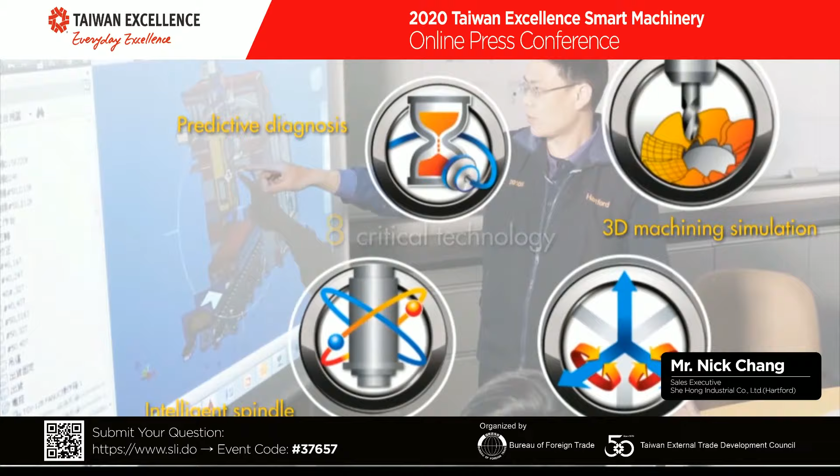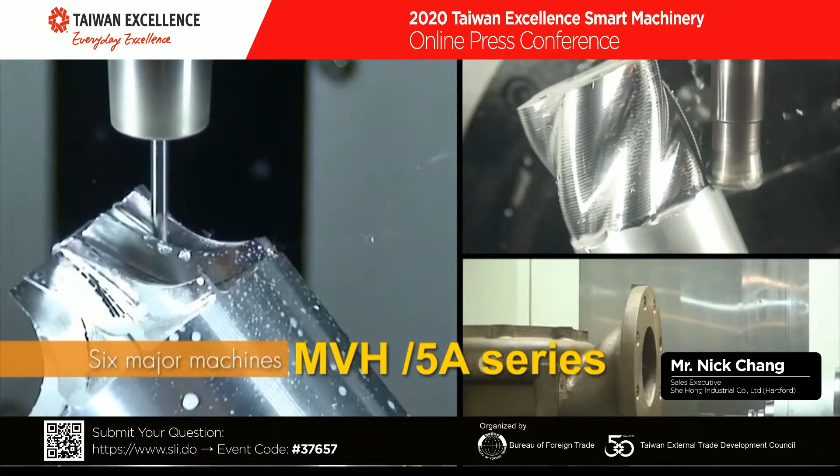And this is our 5-sided machining center and boring machining center, 5-axis machining center, and high-speed, high-accuracy machining center. And we make our key components, angular heads. And this is our 17-meter moving column machining center and rigorous scraping. And we are moving forward for Industry 4.0.

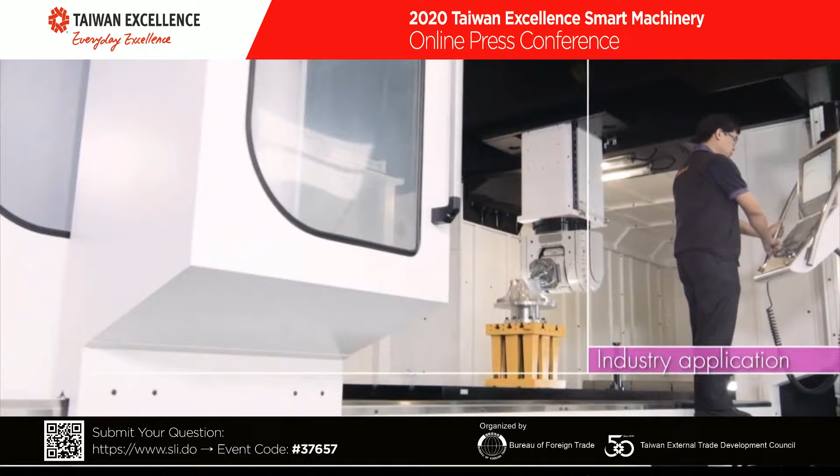We are supplying many industries, automotive, and our global network spans over 65 countries. And this is our service department team.

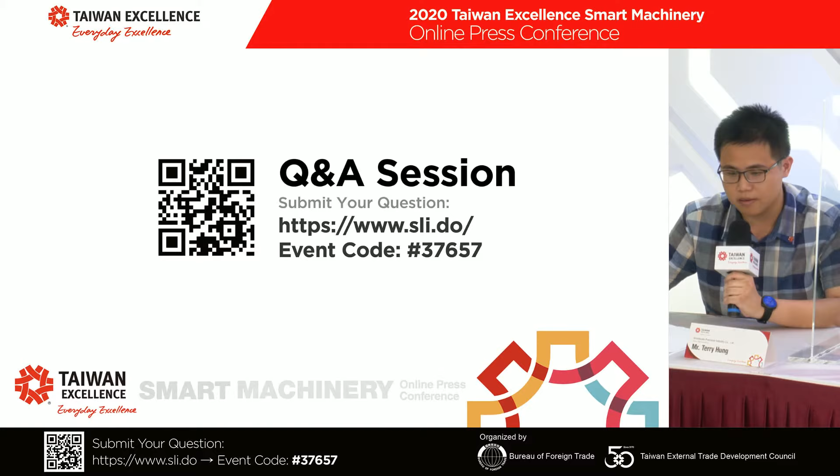Thank you, Mr. Hung. Last but not least, a question for Tong Tai. In the field of smart machine manufacturing solutions, what do you think of Tong Tai's competitiveness in Taiwan and globally? We would like to invite Mr. Jolie Wu to answer this question. Thank you.

So first, Taiwan has been well known in the IT industry. The latest IT technology provides a strong foundation for Tong Tai to build the machine tools of the next generation. To catch up with Industry 4.0, Tong Tai has provided many intelligent manufacturing solutions for our customers worldwide, including the latest technology of IoT, CPS, FMS, and MES. Our solution achieved the goal of virtual representation, digital twin, and cyber physical system.

Being a machine tool provider, we focus on integrating the manufacturing data and inputting it into our customers' ERP and supply chain systems. Through the integration of production data, we believe our solution could be very useful for our customers. Thank you. Thank you, Mr. Wu.